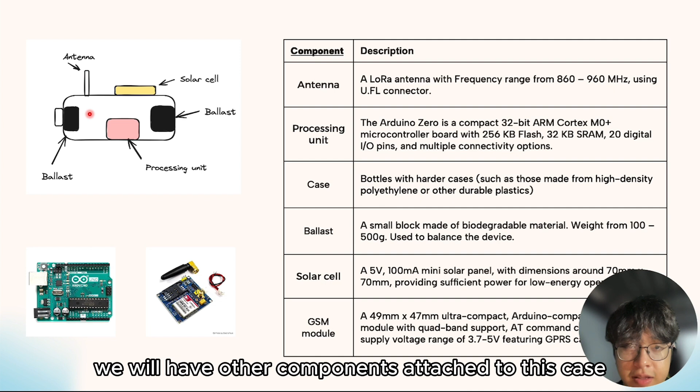We will have other components attached to this case, the plastic bottle: the antenna, the solar cell, the ballasts, the processing unit. The antenna will be used to connect the device with the GSM network.

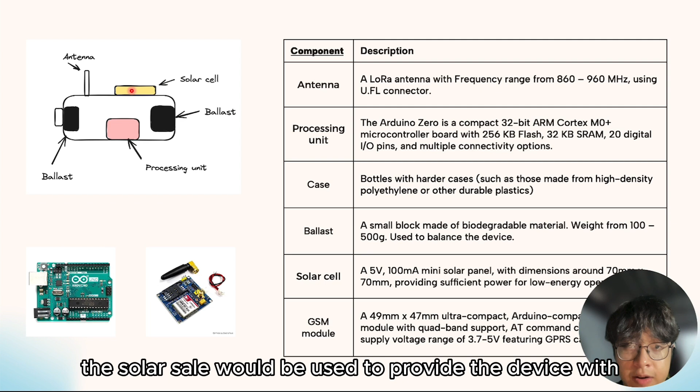The solar cell will be used to provide the device with renewable energy, and the ballasts are there to balance the device, to stabilize it when it is floating in the rivers.

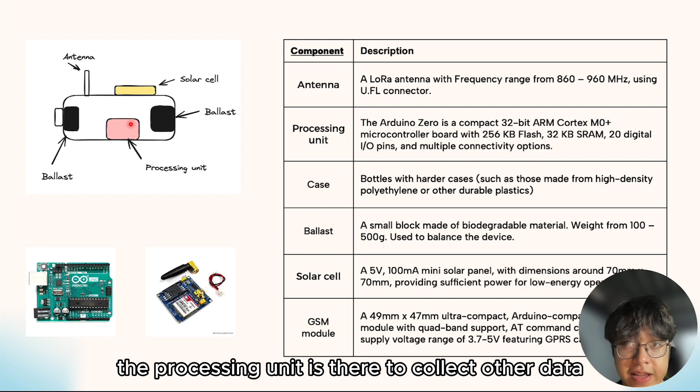Finally, the processing unit is there to collect environmental data and process it before sending it back to the scientists.

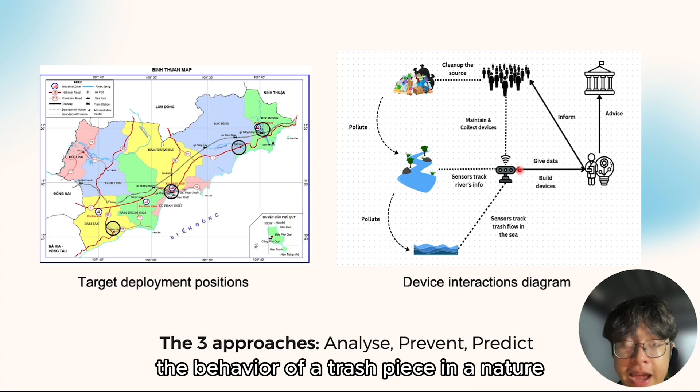So basically, this device will simulate the behavior of a trash piece in nature. It will be strategically deployed across Binh Thuan's river and stream network.

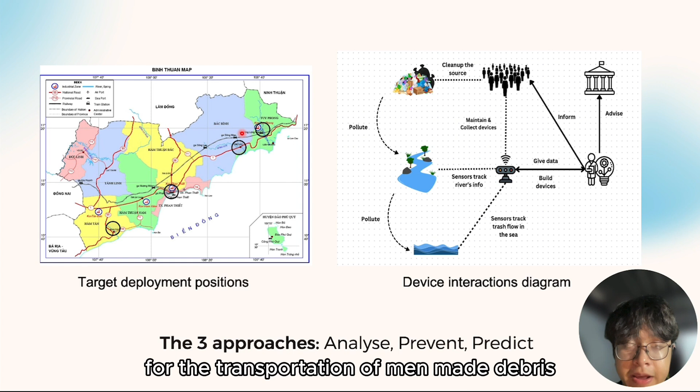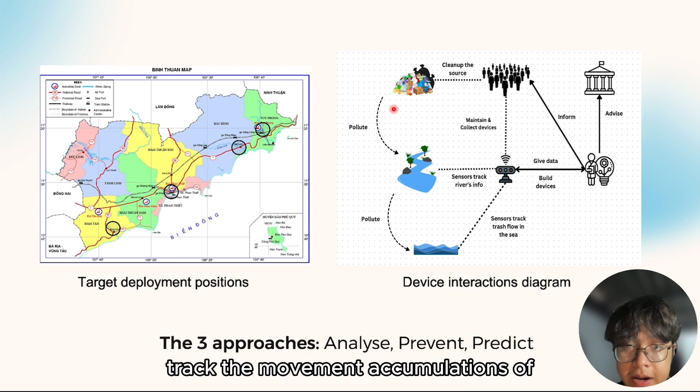Like in this map, these regions serve as a critical pathway for the transportation of man-made debris from inland sources to the coastal environment. By utilizing open source software and advanced hardware, our devices aim to track the movement and accumulation of trash along these waterways before they reach the sea.

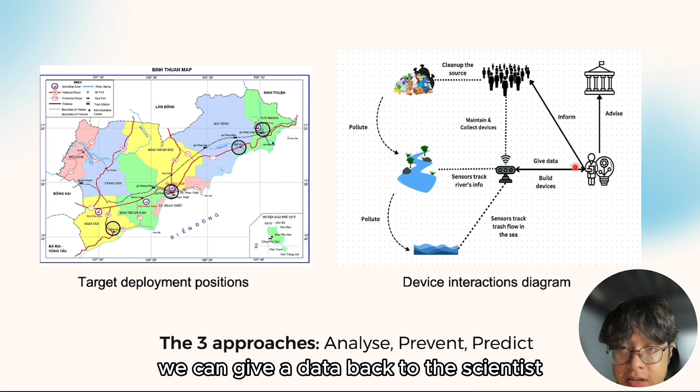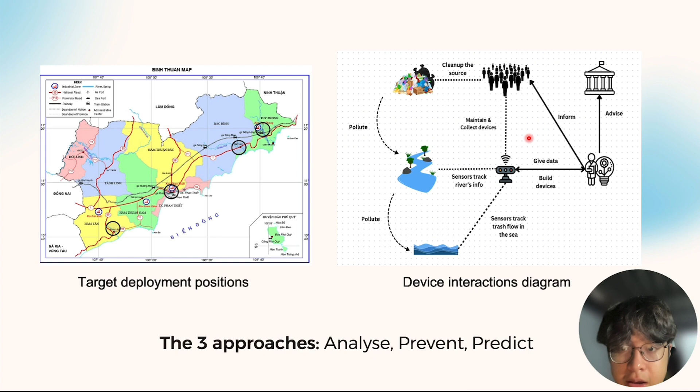After we have tracked the trash flow in the seas and rivers, we can give the data back to scientists, who will inform the users, the population, as well as the government, so that the government can devise campaigns and strategies, as well as raise awareness among the population.

We also have data that can be used for environmental analysis, since that data covers the pollution rate and the current water flow, and this data is beneficial not only for scientists but for future generations.

We also have technology exposure for local people. This means that youngsters will be able to gain experience working with these devices, which will help cultivate a passion for technology in them.

We also have long-term policy formation. Since we have lots of data from the environmental analysis, this will help the governments and authorities make new policies to control pollution better.

The devices are also affordable and non-invasive, since the materials are reusable as well as biodegradable. For the constraints, there are some limitations.

The first one being the digital literacy requirements. These devices are very complex and require some maintenance as well as expertise, so there will be a need for proficient engineers.

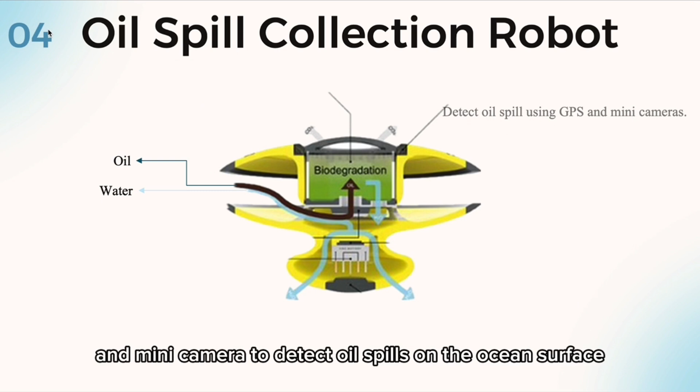Our robot is equipped with GPS and a mini camera to detect oil spills on the ocean surface. Once an oil spill is detected, our robot will move to the location and start the collection process.

When oil and water enter the robot, the first step involves the use of specialized oil-eating bacteria, which help degrade the oil, reducing its volume.

Furthermore, a pump inside the robot works to separate the oil from water. The clean water is then expelled back into the ocean, while the collected oil is stored within the robot for safe disposal later.

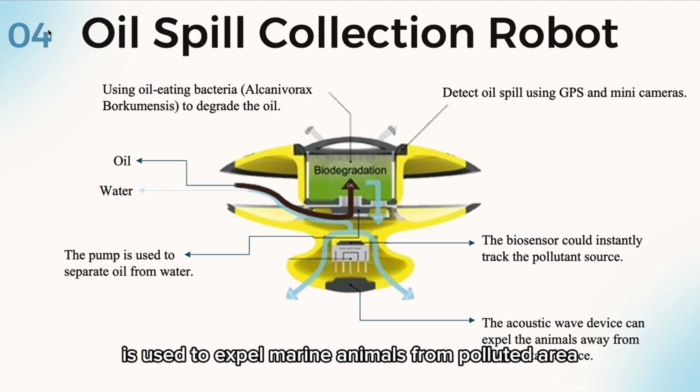Moreover, the robot features a biosensor that can instantly track the pollutant source, ensuring precise and effective cleanup. Additionally, an acoustic wave device is used to expel marine animals from polluted areas, protecting wildlife from the harmful effects of the oil spill.

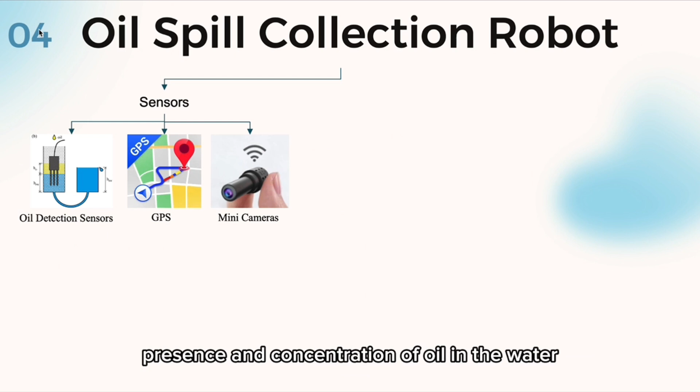Among the technologies and devices used in this design, first we have the sensors, including an oil detection sensor to identify the presence and concentration of oil in water, coupled with GPS and mini cameras. Then we have the control system, using microcontrollers like Arduinos to process data from sensors and control the robot's actions.

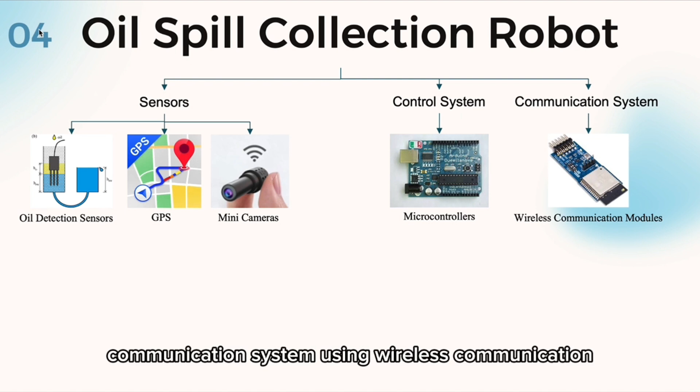We also have the communication system, using wireless communication modules for remote monitoring and control, and the power system, using battery packs with high-capacity rechargeable batteries to power the robot's components.

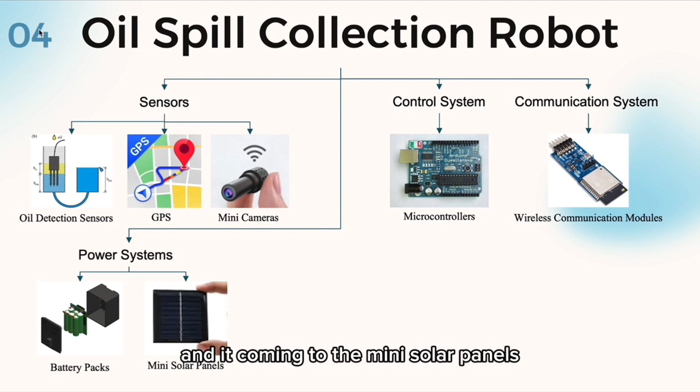It also comes with mini solar panels to extend the robot's operational time by harnessing solar energy. Additionally, we have collection and storage devices, including skimmers and mechanical devices that float on the water surface and collect oil, along with absorbent materials that absorb oil while repelling water, used in conjunction with the skimmer.

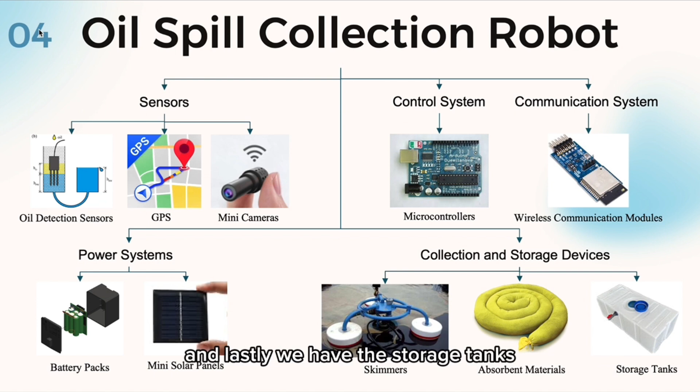We also have storage tanks to store the collected oil until it can be safely disposed of or processed. Next, our oil spill collection robot operates through three main stages: the design and development stage, the deployment stage, and the operational stage. In the first stage, design and development, we use a systematic engineering design approach.

We start with the conceptual design, defining the robot's objectives and creating initial sketches and models. Next, we move to prototyping, where we build and design physical models. Finally, simulation and testing help us refine the design by using virtual environments and physical tests to ensure the robot meets all specifications.

Moving to the deployment stage, here we focus on field testing and calibration. The robot's sensors and control system are carefully calibrated to ensure accurate detection and navigation. Through field testing, we deploy the robot in a controlled environment to assess its performance and make necessary adjustments.

Training the robot with machine learning algorithms using data from tests enhances its decision making and efficiency.

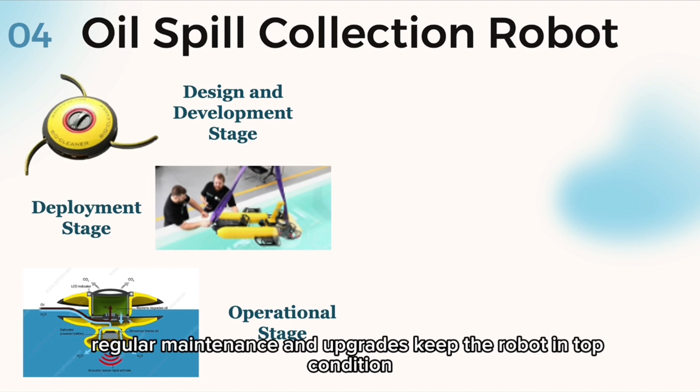In the operational stage, we advertise real-time monitoring and maintenance. We continuously monitor the robot's function using on-board sensors and external control systems to ensure effective oil spill detection and response. Regular maintenance and upgrades keep the robot in top condition, and we analyze operational data to improve future design deployment.

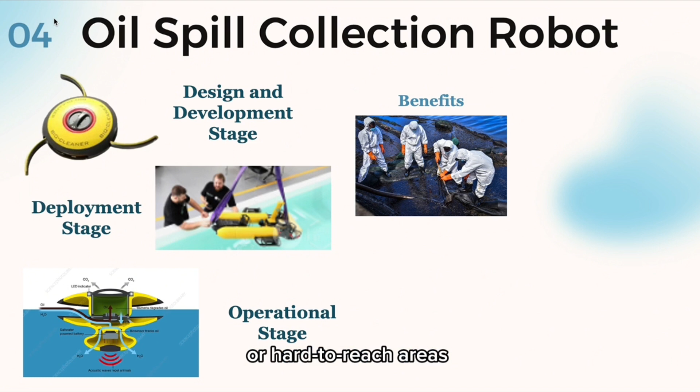Our oil spill collection robot offers a number of benefits, including quick detection and removal of oil spills, which minimizes environmental damage. It can work continuously without breaks and operate autonomously in dangerous or hard-to-reach areas, enabling continuous cleanup without risking human lives.

The impact of the technology is significant, aiding in the rapid recovery of the ecosystem, reducing the economic impact on industries like fishing, tourism, and shipping, and helping protect public health by ensuring cleaner water.

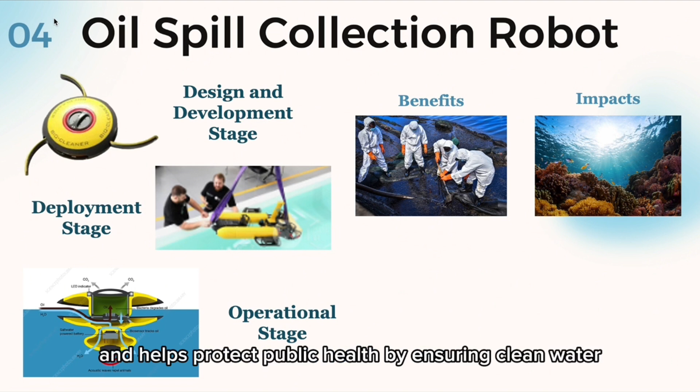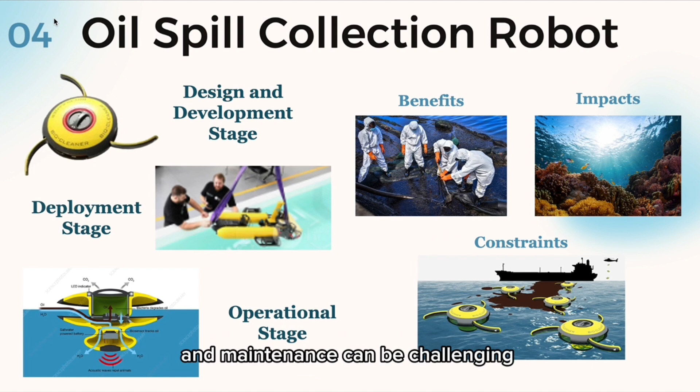However, there are tradeoffs to consider. The initial cost for development, production, and deployment is high, and securing consistent funding and resources for operation and maintenance can be challenging. Additionally, harsh conditions such as extreme weather and rough seas can limit the robot's effectiveness.

My design aims to rejuvenate coral reefs reliably using a blend of cutting-edge technologies, combining submersible drones, specialized coral bonding tools, advanced environmental sensors, and a user-friendly mobile app. This innovative approach addresses critical issues facing coral ecosystems, such as habitat degradation, climate change impact, and biodiversity loss. Integrating these technologies takes a significant step towards sustainable marine conservation and enhancing ecosystem resilience.

There are three main hardware components. First is submersible drones equipped with high-resolution cameras and robotic arms. These autonomous underwater vehicles capture detailed images of reef conditions and accurately place coral fragments on damaged reefs, built to resist saltwater corrosion. They feature advanced batteries for extended operation and sensors for precise navigation and obstacle avoidance.

The second component is coral bonding tools, specialized equipment designed for reef rehabilitation, featuring biodegradable bonding agents, ergonomically designed for use by divers or remotely operated vehicles, adaptable to various coral species and reef structures.

The last component is environmental sensors. These sensors monitor key water parameters in real time, such as temperature, salinity, and pH level, providing accurate data crucial for assessing the health of coral ecosystems. They feature robust wireless communication capabilities for seamless data transmission, ensuring timely decision making in conservation efforts.

There are also three main software components. First is data analysis software, which handles and analyzes large volumes of environmental data collected by the sensors, allowing researchers to extract actionable insights for effective reef management and restoration.

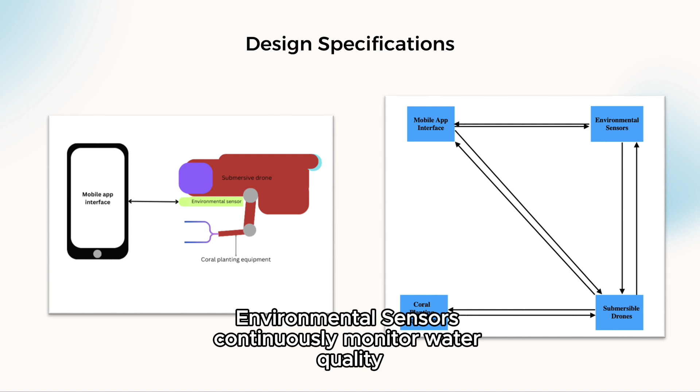Environmental sensors continuously monitor water quality parameters and feed real-time data into the mobile app. The mobile app provides stakeholders, including local communities, scientists, and policymakers, access to environmental data, reef condition alerts, and engagement opportunities, increasing efficiency and effort in restoration.

The integration of advanced technology significantly improves the efficiency and effectiveness of coral reef restoration efforts.

The mobile app fosters community involvement, providing accessible information and promoting collective action in reef conservation and restoration. Scientific advancement enables comprehensive data gathering and analysis, advancing our understanding of coral reef ecosystems and informing strategic conservation planning.

Welcome to our presentation on Design Idea 5, a handheld vacuum cleaner.

This innovative device incorporates a cyclone release catch for easy separation of the cyclone assembly, a cyclone assembly for efficient debris separation using centrifugal force, a bin assembly for primary dust collection, a suction mechanism to generate airflow, and a filtration system to capture fine particles, ensuring clean exhaust air.

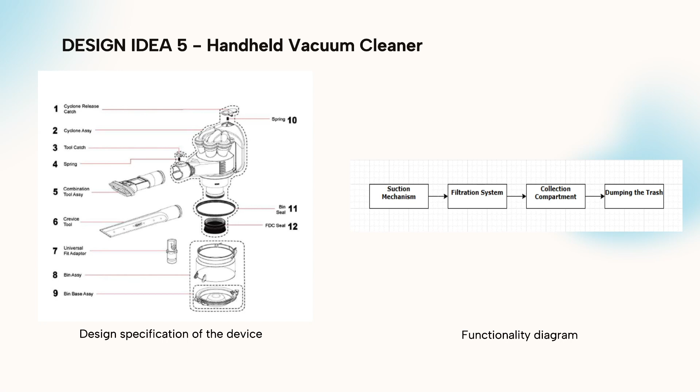The vacuum functionality includes drawing in debris through the nozzle, separating larger particles into the bin, trapping fine particles in the filtration system, expelling clean air, and allowing for easy bin disposal. Key benefits include efficient and thorough cleaning, powerful suction, an easy-to-empty dustbin, and a hygienic filtration system.

Our design approach spans from user-centric design, technology integration, and sustainability focus in the conceptual stage, to simulation and modeling, rapid prototyping, and collaborative development in the development stage, and finally to pilot testing, scalable production, and community engagement in the implementation stage.

For technology, we include high-capacity rechargeable lithium-ion batteries with an integrated solar panel for eco-friendly charging and extended operation time, and an advanced multi-stage filtration system with HEPA filters to capture microplastics and other fine debris, featuring replaceable and washable filters for efficiency and sustainability. Despite challenges in cost and accessibility, we are committed to making this technology affordable and widely available.